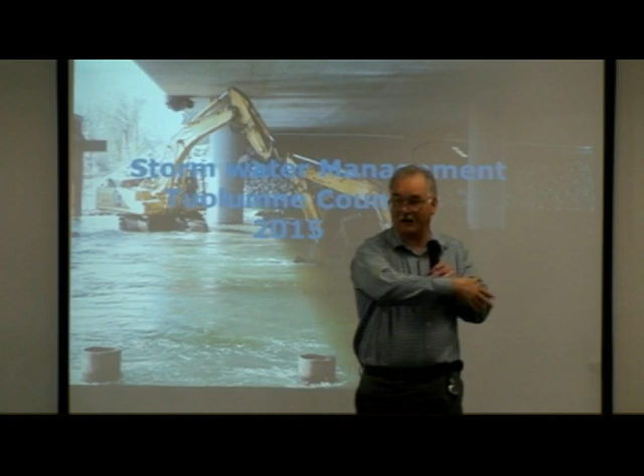We have a really good speaker, Rich Muhl from the State Regional Water Quality Control Board. It covers about 12 counties, and he has been involved in a lot of stuff that I'm going to let him talk about, especially with these fires. As you know, we had our own catastrophic fire, and you get a lot of erosion coming off of those situations, so we'll talk about that.

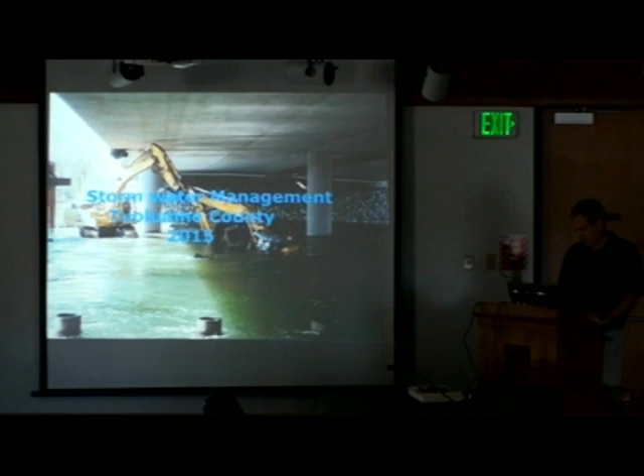And this picture has nothing to do with Tuolumne County. I just like the picture because if the excavator falls into the Sacramento River, it's a little hard to get out sometimes. So this is sort of what's going on here. One of the contractors made a little bit of an error, and it went right into the river.

So today I'm going to talk about some of the pitfalls that people have made when they've worked on construction projects. Some of those have resulted in enforcement actions. So I'm going to talk about some of the things people are not doing regarding the permit. What's going on with the permit right now is, as everybody knows, the new permit came out about 6 years ago. Everybody kind of had it figured out. The economy was doing pretty good, and then the economy sort of tanked. At that point, construction kind of stopped.

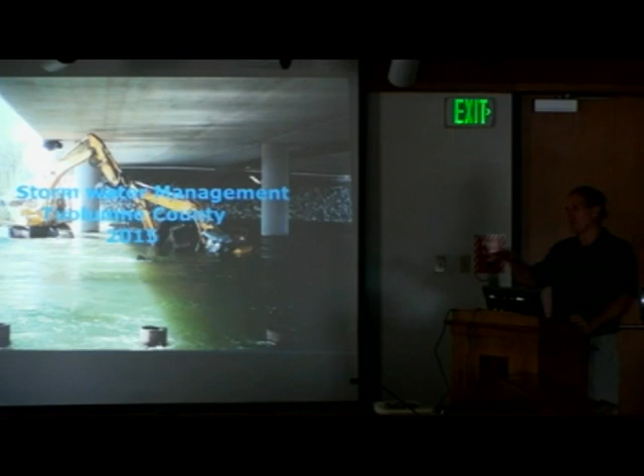And now people seem to have forgotten about the permit. Some people coin it selective amnesia. You can call it what you want, but at any rate, a lot of people don't understand the particulars of the permit, particularly risk level 2 and risk level 3 requirements. So that's what we're finding. So a lot of it is going to these sites and retraining on-site personnel on what the requirements actually are. So we've been pretty patient about doing that, and we're trying to work with everybody on it. But on the other hand, if you sign up for the permit, you have to implement the permit.

So I'm going to talk about a few things. I'm going to go through a site scenario, kind of a case study on a site that didn't follow the permit, and I'm going to talk a little bit about what they didn't do. I'm going to try and use that to show an example of what you don't want to do. And then I'm just going to talk about some other things. So we'll just get going. The first thing is, if it's over an acre, you have to file for coverage.

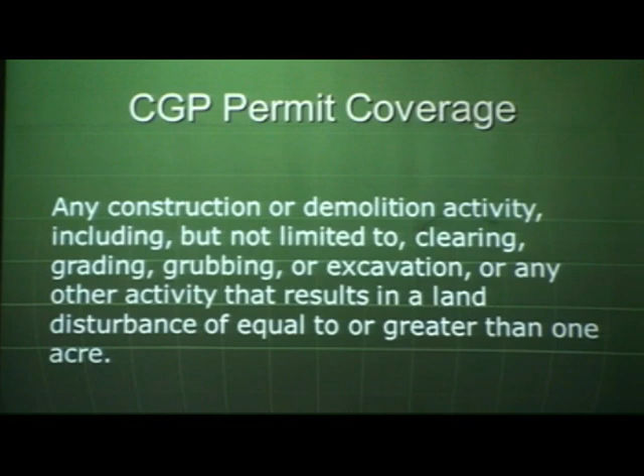You need to file for coverage if it's clearing, grubbing, grading, or excavation over an acre. A lot of people forget to file for coverage. It's clearly over an acre, and they don't file. So that's the first thing.

The second thing is the rainfall erosivity waiver gets used a lot. It's a great tool, designed for projects that are short-term and aren't going to be a risk to water quality. But if you try to get a waiver right now and go through November, that's probably not going to happen. You're going to be a threat to water quality.

There's other issues. For the rainfall erosivity waiver, if anybody's not familiar with it, basically you calculate the R value, and if it's less than 5, you qualify for that particular waiver. It has to be between 1 and 5 acres. So in some ways, it's a good tool, but it gets overused.

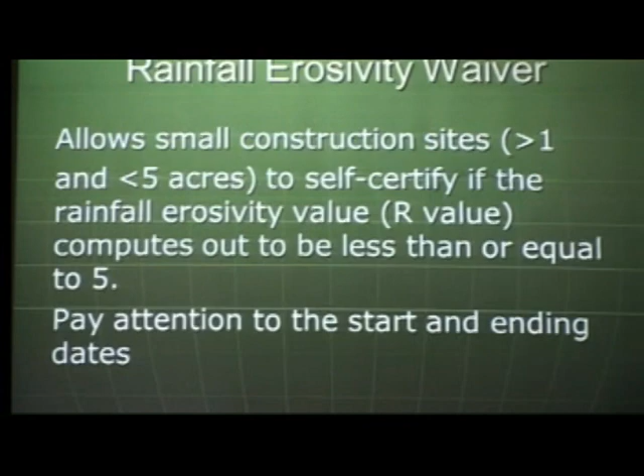The other thing to pay attention to is the start date and the ending date. When you file for the waiver, you put your start date and your ending date. Everybody pretty much knows construction projects hardly ever get going when they're supposed to. So invariably, you start a month later. Well, now that's a month out of your waiver, and you end up a month later, so you don't qualify for the waiver. That's one of the problems we're having.

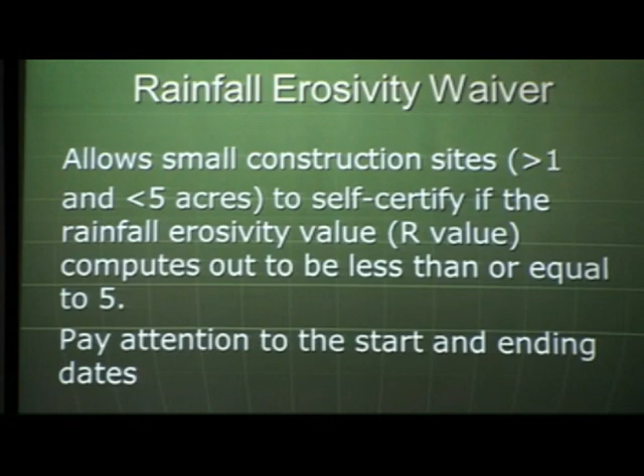There's a new permit coming out in about a year, and we're looking at putting some end date or some way to end the waiver, so we know it's complete. Sort of like a notice of termination under the construction permit - you'd have to send in photos and show it's stabilized. That's the other problem: people say, I have a waiver, I don't have to do anything. Well, yes, you have a waiver, but you still have to install best management practices, BMPs. So that's the other issue we have with waivers a lot.

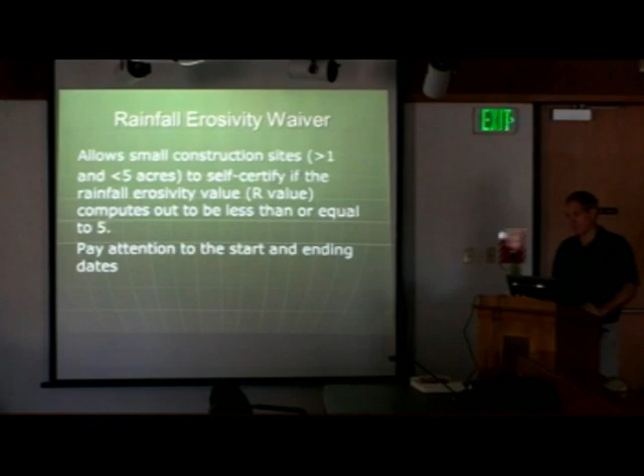Can you re-establish the start time of the waiver if you're starting a month late? Can you qualify your waiver? Yes, you can, but that only works so long, and then you get outside of that R value, above that 5 on the R value.

In the summer, you can kind of get away with that - if it's 20, 30 days, that's not a problem. But if you try to do that in the winter, it won't work, and then you've got to file for full permit coverage. So it creates an issue.

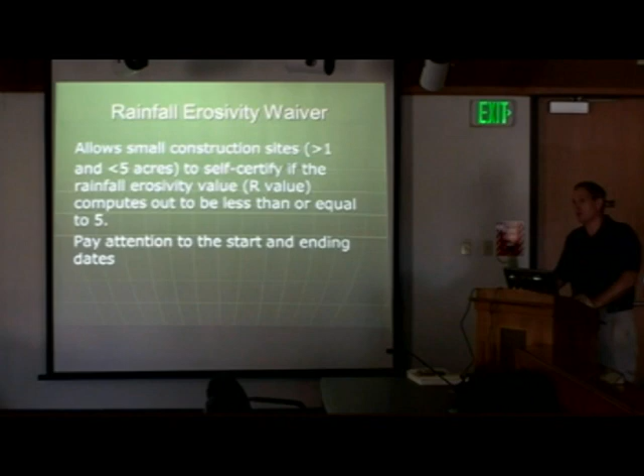Just make sure that when you pick those waiver dates, you're picking the date you're pretty sure it'll actually start. It doesn't take long to get a permit anymore - it's all done electronically. You don't have to mail it in and do all this other stuff, so it goes a lot quicker than it used to, which was sometimes 2-3 weeks if they were busy. It's not that long now, so you can compress it a little closer to your actual start date. Just a suggestion, because I love the waiver - I think it's a great tool, but it just gets overused sometimes.

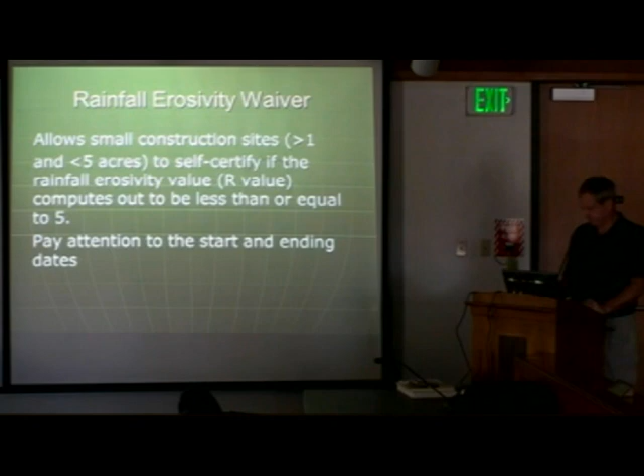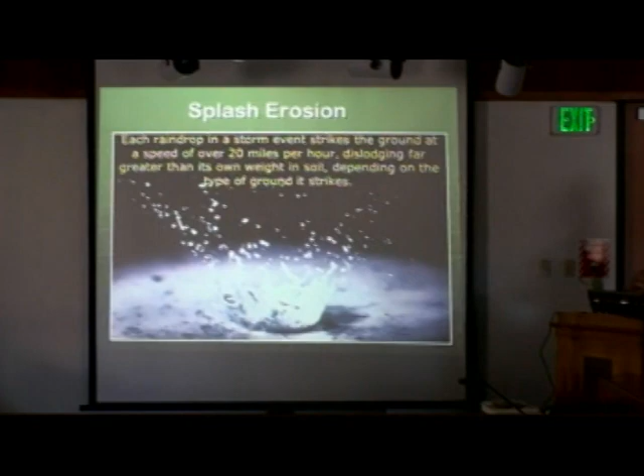Just a little bit of background: when it rains, the raindrop comes down about 20 miles an hour, hits the soil surface, blasts apart those particles, and causes erosion. Typically on a construction site, about 70 to 80% of the erosion is sheet erosion, and that's really what you're trying to catch.

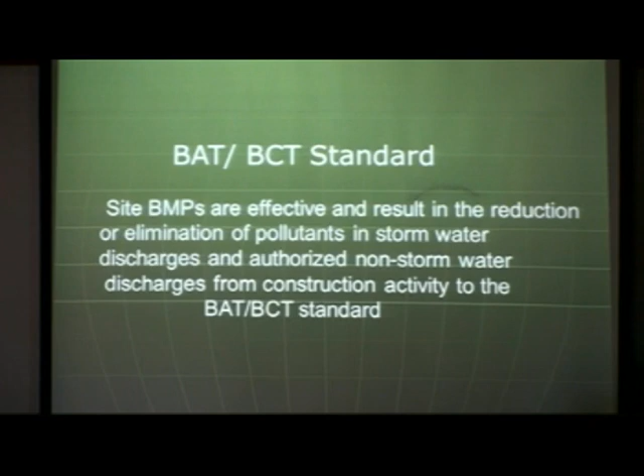I want to talk also about the BAT-BCT standard. The permit requires BMPs to meet the BAT-BCT standard, and a lot of BMPs don't. Hay bales, probably not BAT-BCT. If you want to build a check dam, hay bales work great, but not so good - there's better technology out there. One of the things we do during inspections is take a look at what BAT-BCT is and make sure people are using the available host of BMPs. I'll show an example in a minute of what I'm talking about.

And this is getting people in trouble. There are some old BMPs that work in certain situations, but there's better BMPs out there.

Hey Rich, BAT, BCT, what's that acronym? I don't know, here we go. I always forget it. Best available... here, I got it written down. Best available technology, economically achievable, and best conventional pollutant control technology. I always forget that.

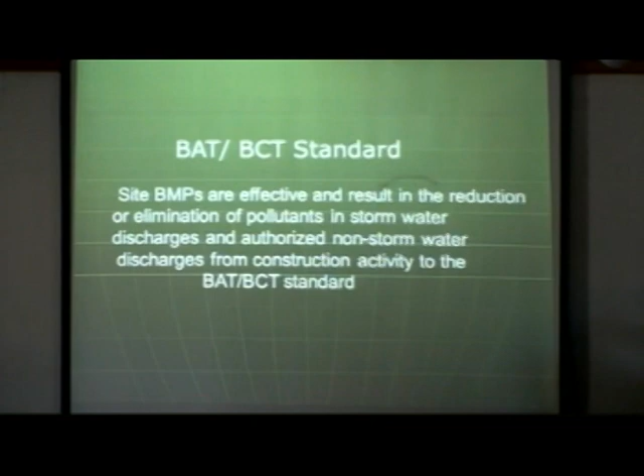But in the last probably 5 years for construction sites, the BMPs have gotten much better. The technology for erosion control has just gone leaps and bounds better. For sediment control, kind of the same. I mean, it's still silt fence, fiber rolls, your basic BMPs, that hasn't changed a lot. But for erosion control, it really has.

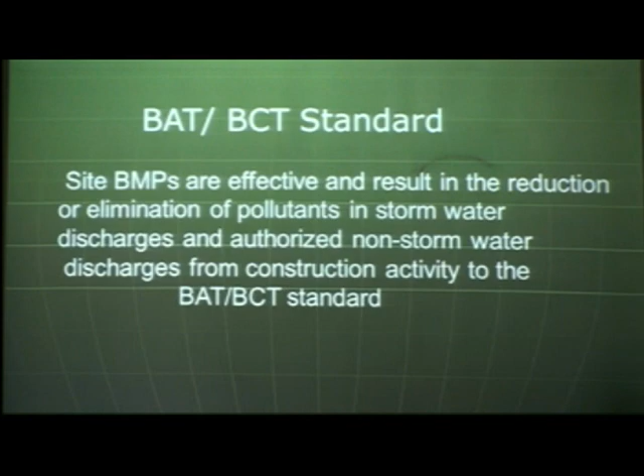They started working on this project in the winter. That right there is a red flag for us. We're going to really pay attention for any project working in the winter, particularly one this size.

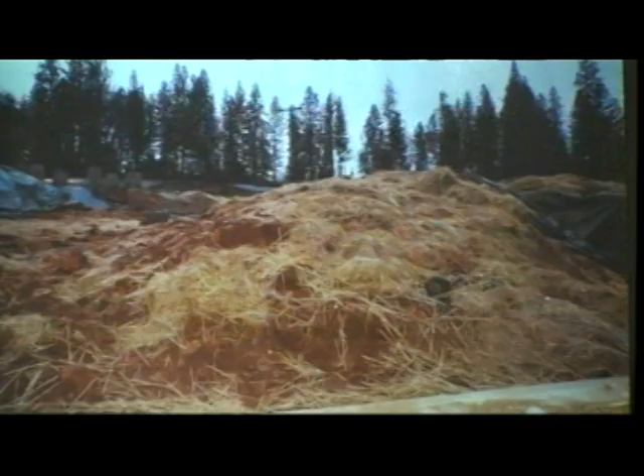So what they did is they went out and hand-broadcast straw as their BMP. Now when you look at this picture, you can see a lot of shadowing, you can just see soil. It's worse than shadowing - this is not going to protect the soil from the impacts of the raindrops once it starts raining. Clearly not BAT-BCT.

This is kind of what I was talking about. There are better BMPs out there that would have worked much better.

The other thing they're using on this particular site is a lot of plastic, Visqueen. Visqueen blows off the slope. So a lot of what happened to them - I'll show another picture - but it's on a big slope. Here's another picture during the rain.

You can see they put some more straw down because we'd been there multiple times. But again, no tackifier, it wasn't tacked down, hand broadcast, and it just washed away. You can start to see the rilling that's occurring. This is all going across, discharging directly into the creek.

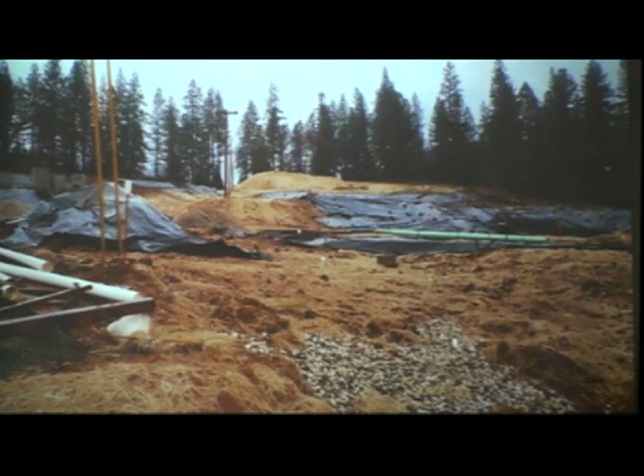Another shot of the same site. Again, a lot of plastic. What would happen is the wind would come up. It's a big slope, exposed to the wind. It would blow the plastic off every single time.

So we'd come back - I'd come back early in the morning. We have a couple inspectors in this area, so depending on who it was, somebody would come at night, somebody in the morning, but it really didn't matter. The plastic would be blown off the slope. So that was a huge issue for us.

And then the other thing is you can still see bare soil. If I can see bare soil, that's not a good installation of that particular BMP. Straw works, but you've got to get it on really thick. You can't do it like this.

Again, same type of thing. So now we've been there - I've been there at least 3 times. I've told them they need to have better BMPs. The city's gone out and done a stop work order on them, multiple times. Still, these are the BMPs they're going to use, and it's not an issue - according to them. So this is what's going on.

So we're going out here over and over and over. The other thing is - oh, this got fuzzy, sorry about that - but anyway, they have a storm drain here, and you can see how dirty the road is in front of the site. At the storm drain, they just got a couple rock bags. That's their particular BMP by the storm drain. It's not going to work when it really starts raining.

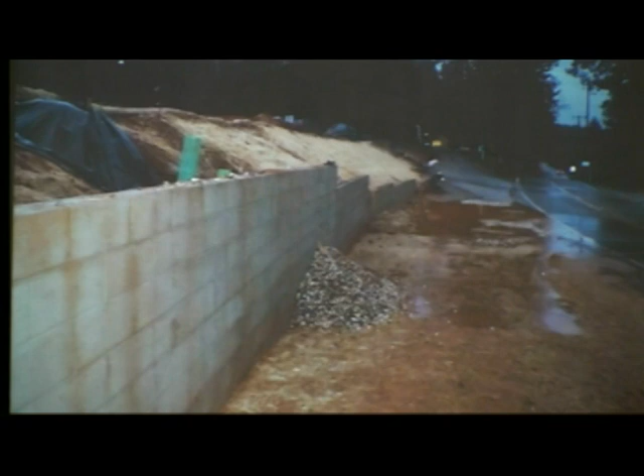So now it starts raining. I'm out there early in the morning. I had to wait to take pictures because it was way before the sun came up. But at any rate, it was discharging. It wasn't raining pretty hard, but it was still discharging. You can see it's coming through the wall - there's a little hole in the wall by that rock. It's ripping out there, and it's also going all the way around.

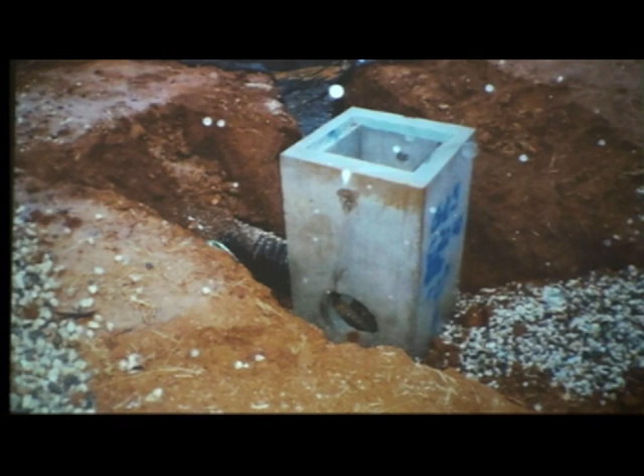The other thing is they have part of their storm drain system in, which could have been good, except that they didn't really have it protected.

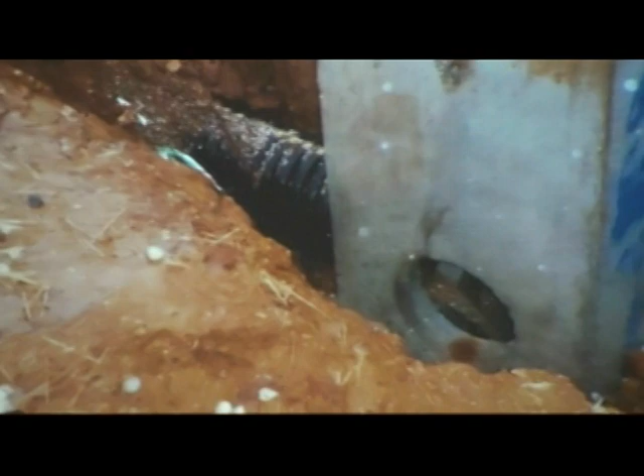So all the water on the site was going down into the storm drain. If you look in the little pipe there, you can see it popping down in the bottom, and it was going directly into the creek. So now they really just created a direct conduit to the creek, where before they had a little bit of buffer, the road, but now it's going directly to the creek.

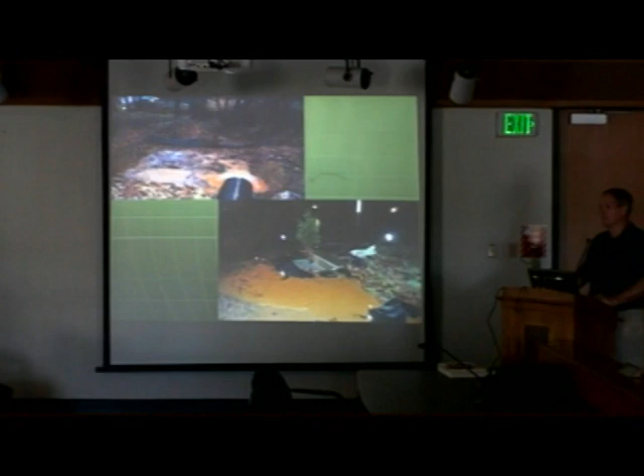So this is what it looked like. Here's the discharge directly into the creek, and they had silt fence. Well, the silt fence never had a chance. That's not what silt fence does. It doesn't work that way.

And down below, I talked about the actual rock bags. Those aren't working either. Some of the water is going straight down, but it hits another storm drain and goes directly across into the creek. So major problem on this particular site.

The problem is they had multiple chances to get out of trouble and they never did it. And the lesson here is if you have a regional board inspector or the county comes along and says, hey, you need to do better than this, you need to do better than that, listen. Because one of the things in this case, we did a joint thing. I was working really closely with the local municipality to deal with this particular project, like I do on all municipalities I work with.

And we were really trying to resolve this issue. It turns out they just didn't understand the permit. They felt like as long as it didn't discharge, what's the problem? Well, I was trying to get ahead of it and say when it rains, it's going to discharge, which it did. So that's just a little case study.

We end up with a lot of these, but this one's unfortunate. For me, it's really unfortunate because it didn't have to happen. There are some sites where they're just really difficult, building in the winter. When it really rains, you're just going to have problems. There's not much you can really do. This is not one of those. This could have been solved way up front. So that's the lesson there.

Rich, what were the fines on that site?

I can't talk about it. I just can't talk about it. So, I just can't talk about the case itself, but it's an enforcement action, yes.

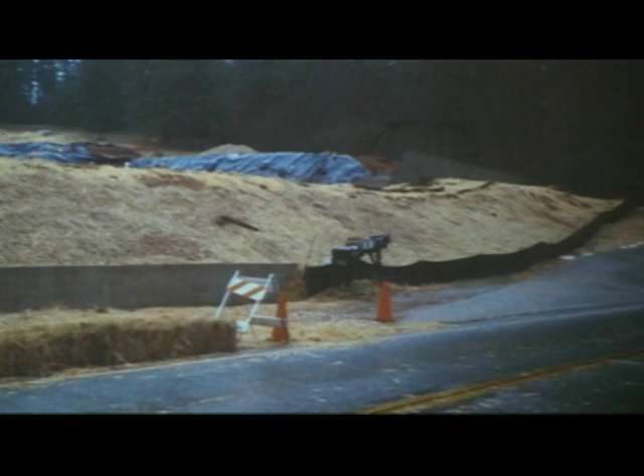So one of the things is finally they used more plastic, but also more straw. So it gets a little bit better. You can still see some dirt, but it is better. And so, you know, this looks a lot different than the first picture. And so now, it's still straw, though.

There's a lot of other BMPs available. So what would be BAT-BCT? Hydromulching, hydroseeding. You probably don't want to use hydroseeding on this particular site - not this site, but the other site I was talking about - because they're going to get back in there and disturb it, and then you just ruin the seed. That doesn't make any sense. There's no point to that.

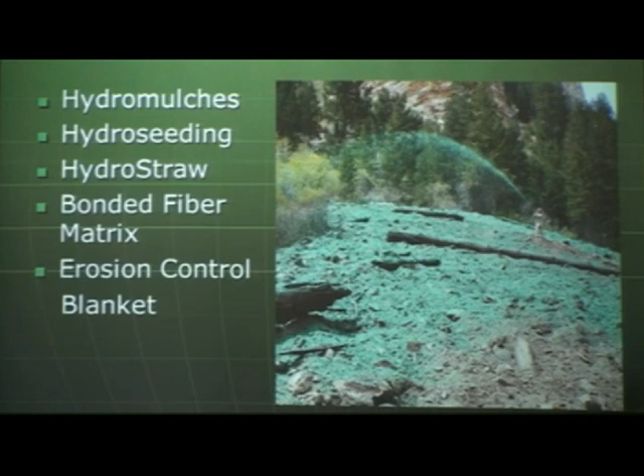But there's also HydroStraw, which is a new product that works really well. It's chopped up straw, but it's in a matrix and it sticks down really good. Bonded fiber matrix - Caltrans used BFM pretty successfully eventually on the Sonora bypass towards the end. And then erosion control blanket. There's a number of things, combination things they could have done on this project that would have made a huge difference. But these are things that are out there.

There's a lot of different products for different things: Flexterra, FGM. There's a bunch of names, but there's all these things that work really well in certain situations. And one of the things that I've really suggested to contractors, builders, and owners is talk to a hydroseeder and have them take a look at it and see what they think. If the straw itself isn't working, which clearly it wasn't in that case, then come up with something different. Talk to a hydroseeder, have them come out. They know what the options are. They're going to know how to help you the best, especially in a situation like that.

And one of the problems with that situation in that case was they kept coming out and rerunning over their BMPs. That's similar to the Caltrans Sonora bypass. What they'd do is they'd install the BMPs and then they'd run right back over them because they were grading those slopes.

And then before it rained again, they'd have to come back and put more BMPs in. So consequently, Caltrans spent a lot of money on the Sonora bypass because they had to keep reinstalling BMPs over and over and over. But that's what the permit requires.

For risk level 2, both active and inactive sites have to be covered with erosion control before a rain event. And up in this area, everything's risk level 2 or risk level 3. Most of it's risk level 2. So both active and inactive - people forget that. That's really an important point because when we're driving around before a rain event, even a day before, we're seeing if people are actually getting out there and taking care of the active stuff too.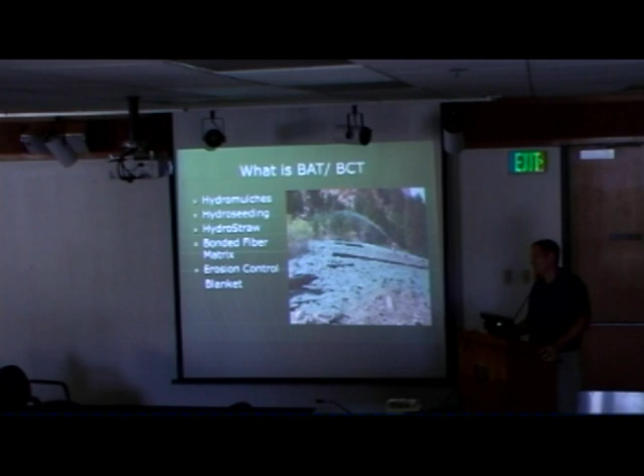And some of these products that are on this list, you also have to put down probably 24 to 48 hours ahead of time because if they don't cure, they're not going to work. If you put BFM down 2 hours before it rains, it's just going to wash off. And Caltrans did that multiple times on the bypass, and it just literally liquefied and ran off, and you'd have a bald spot at the top, and all the bonded fiber matrix would be at the bottom, which doesn't work too well. So you just really got to plan ahead, and that's stormwater management.

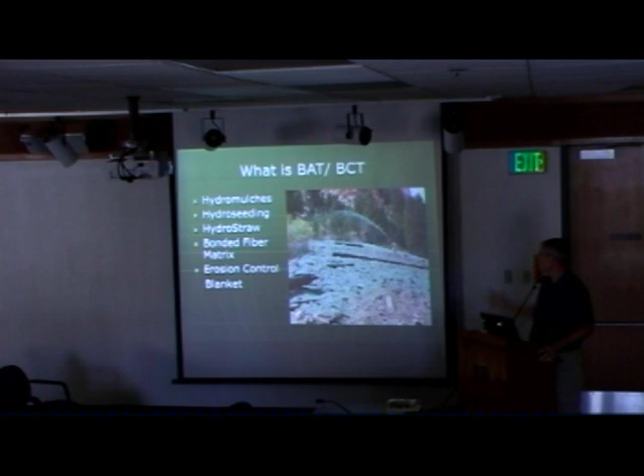So here, I think this is BFM they're spraying on this slope. This is up in the foothills, but it's pretty easy to spray, not that expensive. It's a good, effective best management practice. Any other questions regarding that? Okay.

Fiber rolls - this is the wildlife friendly fiber roll. It's important to use the wildlife friendly version for a couple reasons. One is you don't have to remove it at the end of the project. When we do an NOT, if there's anything that's netted, you have to remove it, including blanket. So if you're going to use the netted blanket or netted fiber rolls, you have to pull it out.

If you use this kind - there's a bunch of different types, there's just one of them, it's the burlap one - if you use the wildlife friendly, you can leave it in place. You don't have to remove it. Eventually, it'll just rot away. You'll end up with the stakes, but you can pull those out later.

So this is a different staking pattern because you're just kind of staking both sides. Caltrans sometimes will run a rope over the top too, to hold it down. No matter what, though, you've got to trench it in because it's round, so you want to make sure you trench it or it'll just cut underneath. That's happened to a number of sites last year too - they just dropped it on the ground. It's round, it's got tiny little bit of touch-in, and the water just goes right under. It's not going to work very well. So fiber rolls work really well.

I like them. They're good for cutting up the slopes. If you want to divide up the slope, because if you can slow the flow of the water down a slope, you're going to get less erosion. And the permit also requires them on slopes. But just use the wildlife friendly ones, and I'll talk about entrapment in a minute.

Rich, if you go back to that previous slide - you might talk about the tracking too that they did there. Yeah, they did track that, I didn't talk about tracking yet. Tracking back and forth horizontally across the slope is a good thing. You don't want to go up and down. You want to make sure that you've got it - did they track? Yeah, they did track the right way. That's got some impact on it from the rain, so it's hard to tell, but tracking is a good basic BMP.

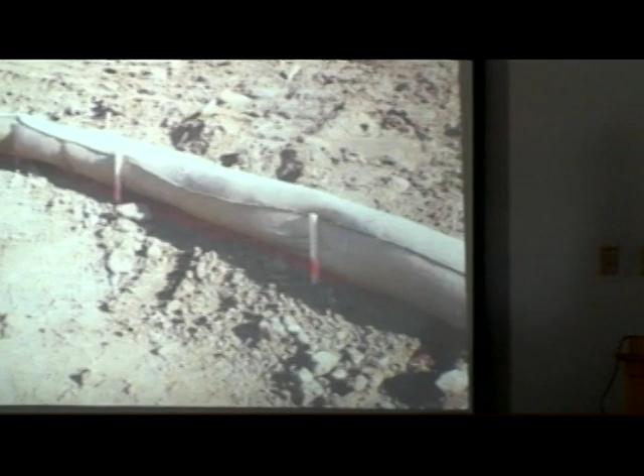You explain the direction of the tracking you said just then. Yeah, you want to make sure the grousers create little breaks, break it up. If you go across essentially, then you're just creating little rills automatically. So you want to make sure you go up and down.

We identify if that's wildlife friendly, but they're not - well, I'll go through it in a minute. If it has a net, it's not wildlife friendly. The regular fiber rolls you see a lot of times, they'll just have that netting on them. If it has the netting, it's not wildlife friendly. And even if it's biodegradable or photodegradable, it lasts for years. I mean, I've seen this stuff for like 5 years, I've been tripping on it on construction sites. So finally, eventually I'll just try and pull it up, but it just takes forever. And if it creates entrapment - I'll go through that in a minute - it creates another problem.

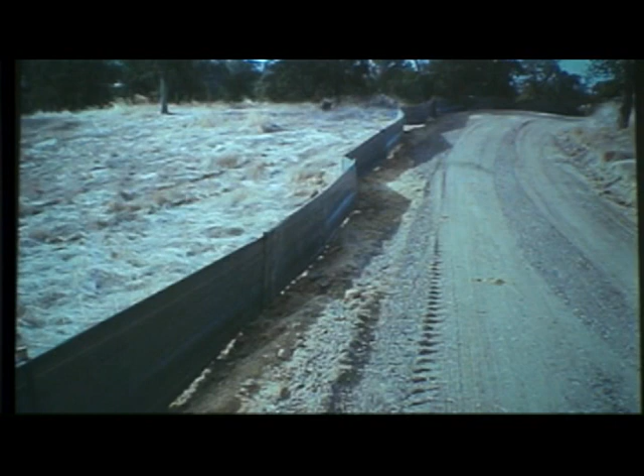Silt fence, you want to make sure it's installed properly. I use this picture all the time, but I just like it. It goes like half a mile they did this, so they had to go clear down the hill and reinstall all this silt fence. It was just the worst silt fence job I've ever seen in my life.

And so there's a line on the silt fence, and it's at the bottom. I think it's orange on this one. And you have to stake it in to that line. It has to be down there tight. So when I'm looking at silt fence, I go along and pull on the top, or I'll kick the bottom, one or the other. But I'll just pull on it to see if I can get it to pull up. So if someone just chucked dirt on the outside of it, I can pull it up. It's not going to work, and then I'll make them reinstall it.

So silt fence is still a decent BMP, but just make sure there's a number of things. If you use the wood stakes, half the time they fall over. They break and fall over, so a lot of people use metal stakes. But there's a number of different types of silt fence now. There's wire-back silt fence. There's all these different types of silt fence out there that will really work pretty effectively. So it's still a good BMP, but it just needs to be installed.

It's also high maintenance. I was told that for every $1 you spend on silt fence, you spend about $1 maintaining it. So it can be pretty high maintenance. So you might want to think about maybe another option if you can do that. So again, you got to make sure it's trenched down. You got to backfill it, because the sediment's going to pile up behind the silt fence, and you want to make sure it can hold it. It doesn't just fall over, and that's what often happens with silt fence.

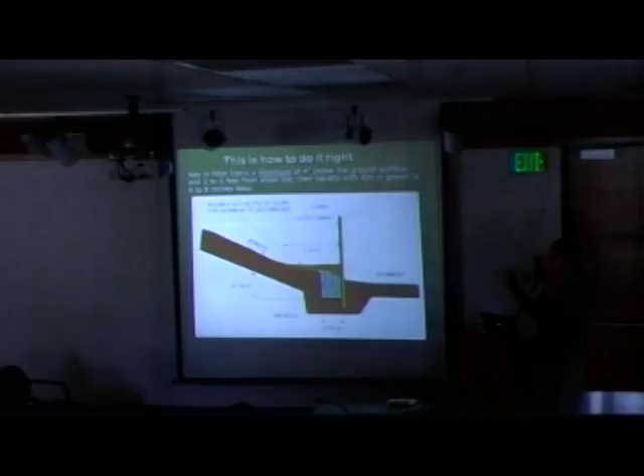That being said, I've seen wire-back silt fence where it had a lot of sediment against it. Essentially, it created a debris dam and didn't break. So I mean, it was pretty robust, but it can work if you design it correctly.

But don't ever put it, I don't have a photo, but don't put it across a flow too. I had one last year, I didn't put the photo in there, where the person put it right across the stream flow. So the stream just came, backed up, and created a little lake. It blew through the silt fence and ripped out half the hill at the same time. So that didn't work so well. So you got to kind of think these things out.

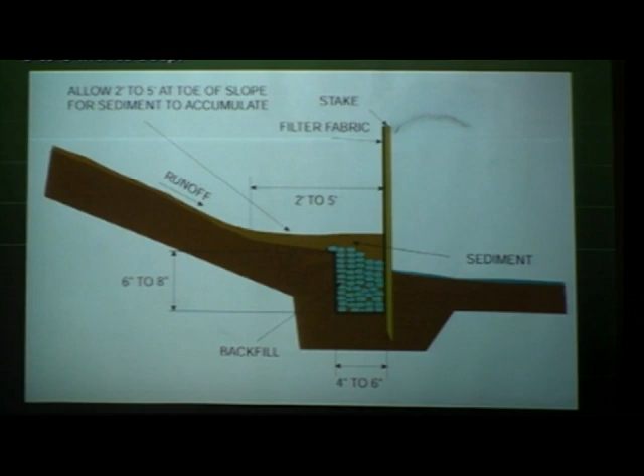So I'm going to talk about entrapment now. What happens with entrapment is we're having a real issue with snakes, lizards, birds. I get all kinds of critters that get stuck in erosion control blanket. And part of it is they'll get in there, they'll freak out, and they'll start wiggling around. I've cut some of them out, and they're totally freaking out. We've saved a couple snakes, and I think I saved a bird once, and everything else is pretty well dead.

So all permits now, Fish and Wildlife permits, U.S. Fish and Wildlife, California Department of Fish and Wildlife, Army Corps of Engineers, our 401s, all require wildlife-friendly erosion control products. So if you use the netted blanket or the netted fiber rolls, at the end of the project, you're going to have to pull them out.

We had a project up in Placer County. It was a large project. They put erosion control blanket out. Turns out it was a netted kind. Our inspector went out, didn't know that. It was right next to Orchard Creek. Went out and took a look at it. It was all netted, had to pull it all out. It cost him $30,000. We felt horrible. $30,000 mistake. And they had to replace it with the non-netted or the flexible joint.

So kind of what I'm talking about, I'm going to pass this around, is the flexible joint stuff. My sample's getting kind of beat up, but what it's got is a flexible joint on it and it'll spread apart. So if a critter gets stuck in there, it'll kind of move.

The other thing to think about, yeah, no, go ahead. Before you leave blankets, you talked about best practices that you see work well with getting vegetation to grow when your blanket is present. Do you see people putting seed under the blanket, over the blanket, both? Both. I think both.

Caltrans uses it, they called it the 4-step, which was the first time I heard of a 4-step program. So they use seed under and seed over. And in some areas it worked fairly well. In other areas it didn't work at all. The problem we're having right now, as everybody knows, we're in a drought. So if you use seed, typically if it pops at all, it'll pop and then it'll die back. And hopefully you've got some root structure. But we're having real issues right now with getting seed to grow.

So a lot of times what I'll see is it seeded under the blanket. They'll seed underneath, they'll put the blanket on top. But it depends how dense the blanket is. If you have a really thick blanket, a coir blanket or something like that that's supposed to last 4 or 5 years, it's really heavy. It's going to be pretty hard to get something to grow through there, because it's not really what it's for.

It's designed more for, and I see that on slopes sometimes, it's designed more for like the bottom of a channel so it doesn't scour out. That's a different type of blanket. So you want to make sure that you're picking blankets that, if you're going to try and plant through them, actually work for that application. Jute, I still see jute used. Jute sometimes works well, sometimes it doesn't.

So construction schedule, again, I said it earlier, but if you're gonna work in the winter months, you're going to have to pay attention to your site. That's the bottom line. We've already identified up in Roseville, Placer County, some sites that are going to work in the winter. You can work in the winter, it's fine. Everybody's okay with it. It's just going to cost you more money. It's going to be more challenging. You're going to have to work harder at it, and you're going to have to spend more money.

So a lot of times in the spring, I'll be out on site and I'll talk with the contractor and they say, we spent like $150,000 on BMPs this winter. I said, well, you worked all winter. I'm not surprised, but they're surprised. So you're just going to spend a lot of money. It's just going to cost money. So just keep that in mind.

So sometimes the benefit is worth it. Sometimes it's not. So just something to consider. When you have plans for work through the winter, that's going to be difficult.

Yeah. Do you appreciate the opportunity to engage with the project early on? I mean, it's hard sometimes to go from the government because they're going to help us. I understand that. But do you appreciate that, or do you just want to do your thing and look for problems? No. I mean, here's my philosophy. My philosophy on everything I do at the water board is to protect water quality. That's what I'm doing.

So I would much rather meet with the contractor, talk to the contractor, and try and work it out. I'm in the enforcement unit, and I do a lot of enforcement, but I don't want to do it. I want to protect water quality. I don't want that stuff dumping into the water so then I can go back and go after the person. I don't want it to happen at all. So I'd much rather be up front, and I think any regional board, if you're talking about Region 1, they're the same way. They're going to want to come out and help you as much as they can.

One of the problems we have is limited time. We're covering multiple projects, multiple sites, and every fall I've already had some calls saying, come out, can you walk my site, tell me what to do. We can't exactly tell you what to do. We can't say, here's the BMP. Sometimes in the foothills up in this area, I'll say, you could use this, this, or this. I think all three would work. But I'm not going to say do this, because then if it fails and I come back and issue you an NOV, you're going to say, that's what you told me to do. So that doesn't make any sense, so we can't do that.

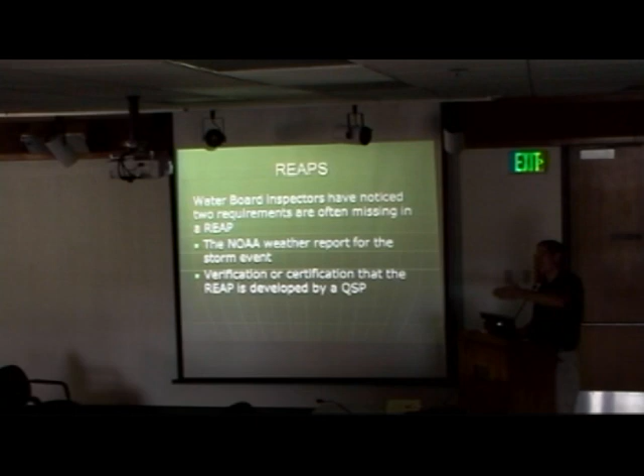The other thing, the rain event action plan - no one likes REAPs. You need to do the REAP 48 hours before the rain event, but you also need to install the BMPs. So a lot of times what happens is people may work on the REAP, but what they really do is try to install BMPs. I'll go out and do an inspection during the rain, and I find they haven't written their REAP yet. I'll say, okay, that's fine, what were you going to put in it? That's more what I'm concerned about. But you still need to do the rain event action plan.

There's a couple things that people don't attach to that. Make sure you're attaching the NOAA weather report - actually print it, staple it on there, so we know how much rainfall was actually forecast. That's one of the things people forget to do. And make sure it's done by a QSP, Qualified SWPPP Practitioner - it's got to be a QSP, or it could be a QSD, Qualified SWPPP Developer too, that's fine. But typically we don't. Just make sure it's not the site superintendent doing this, because that's not what the permit says. And if something goes south later on, we go through all the paperwork and look for any inconsistency, and that becomes another violation. So don't fall into that trap.

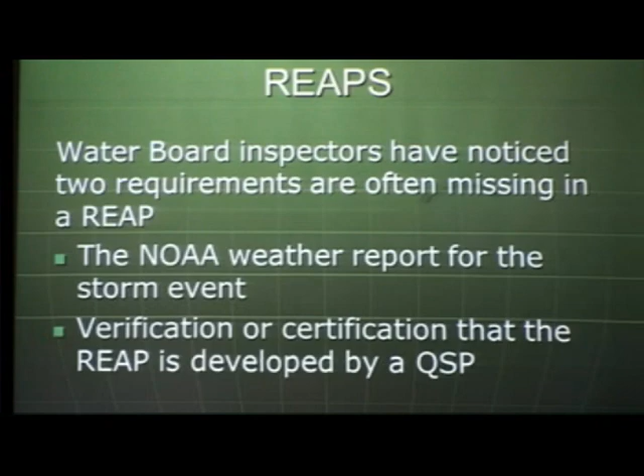Make sure your SWPPP is on site. I'm still running into sites where there's no SWPPP on site. I mean, I know it's uploaded into SMARTS, but I need to see it on the site, at least the SWPPP map, so I can figure out what you're trying to do.

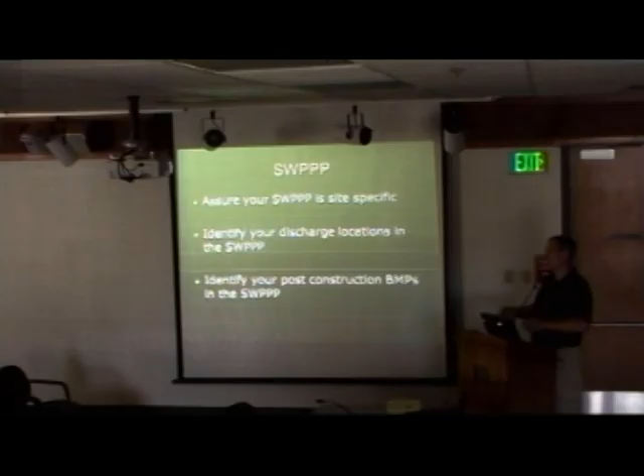You want to identify the discharge locations. I can't tell you how frustrating it was last year - I'd go out and do an inspection, I'd ask where are your discharge locations, and they'd say, well, I'm not sure. You're supposed to be sampling - how are you going to sample a risk level 2 site if you don't know where your discharge locations are? It boggles my mind sometimes. So then we'd have to go out and identify the potential discharge locations, because I don't know for sure, and then they'd sample. But just something to keep in mind - you want to make sure you know where those are.

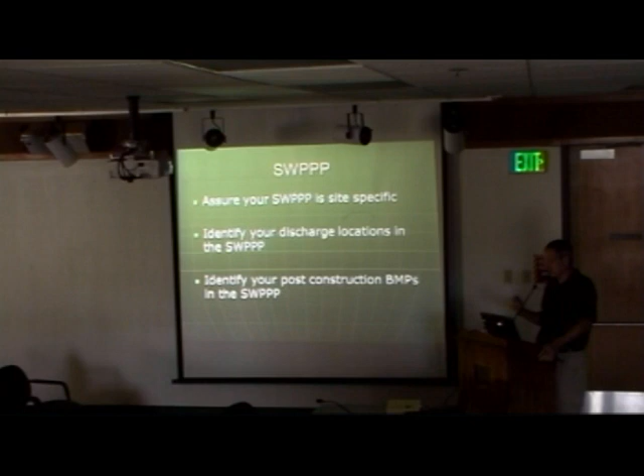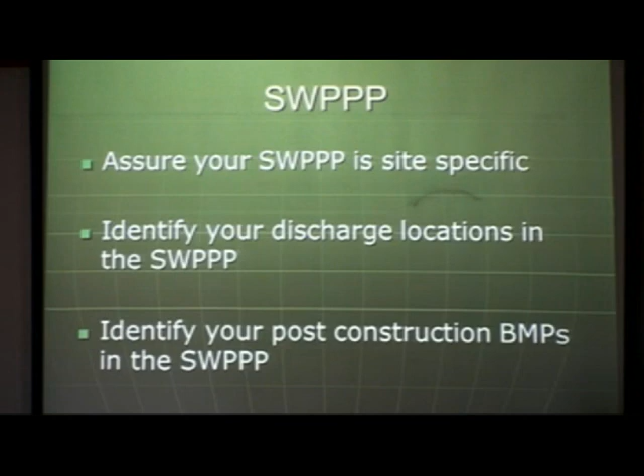The other thing is identify your post-construction BMPs. I'm going to talk about that at the end of the presentation today, but post-construction BMPs are a big deal. What we're doing now before a termination is asking, what were your post-construction BMPs? If you're in Tuolumne County, you're going to use the calculator, which I'll show in a few minutes. If you're in other counties that have a Phase 2 permit, like Calaveras, you're going to use their own requirements, but I'll talk about that in a minute. Just make sure you've identified them in the SWPPP - what you're going to use.

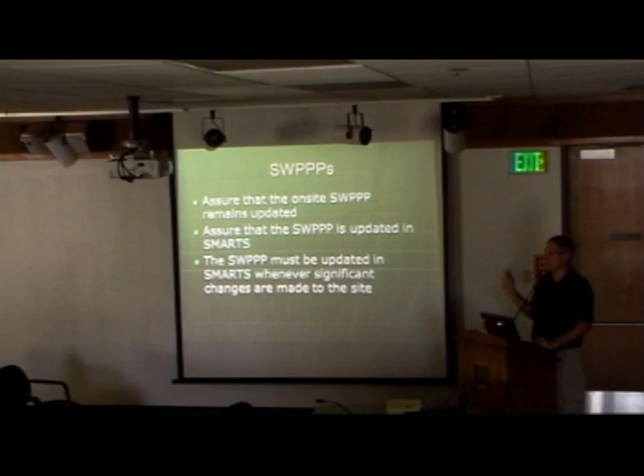Also, make sure it's updated. I've been to several sites where they've made pretty major changes to their facility, the way they're building it, and then they didn't change the SWPPP, so it totally doesn't reflect the site. And if you make major changes, make sure it's updated in SMARTS too - that's the other thing.

Monitoring and inspection - just be aware post-rain event inspections are required on all sites, regardless of the level of activity, even risk level 1. This gets people in trouble all the time. An inactive site still has to comply with the permit requirements. So if it's inactive and you have a permit, you can terminate it, or you can refile for coverage if you want to do that. If you stabilize it, most people don't want to do that, but if you completely stabilize it, you can terminate it and then start again in the spring - some people do that. But if it's active, you have to go out and do weekly inspections and maintain your BMPs.

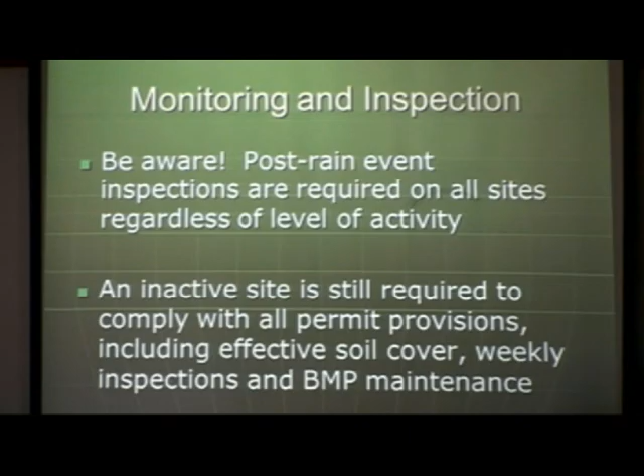So if you're in Tuolumne County or Calaveras or wherever, and you're above the snow line and you get a lot of snow, it's kind of hard to do an inspection when snow is covering your BMPs - talk to me, because then I can give you an exemption and work with you to relax those requirements. Typically what I'll do is have folks go out once a month, take a look at the site if they can get there, and just make sure it's all stable. But it depends on the site, where it's at, and a lot of other things - I can work with you on that. But if it's one that's going to be exposed year-round, you still have to go out and do those inspections, just the way the permit works.

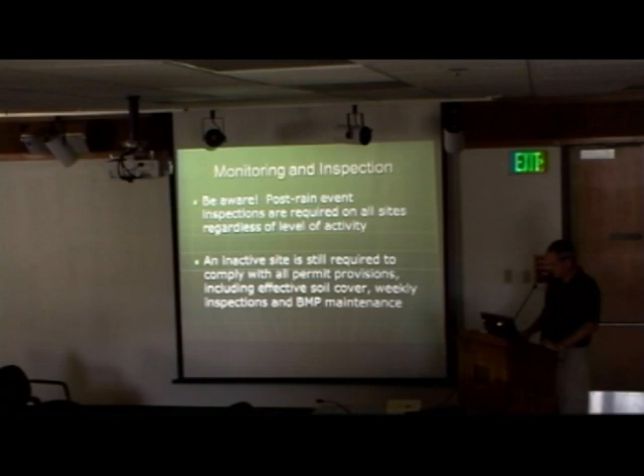So this is an inspection report, which says nothing. It's a bunch of checks. Yes, no, no, yes, no. Every inspection report on this particular site for this one looked exactly like this. Didn't say a single thing.

When I go out and do an inspection, I'm looking for good things, mostly for photos for classes like this, or I'm looking for bad things, probably for photos for classes like this too. But nevertheless, I'm looking at both, and I can always find both. There's both out there. So how can you do an inspection and have nothing wrong with the site?

Typically there's something. Just write something down that you're going to improve. I mean, don't make stuff up. If it's perfect, it's fine. But normally that's not the case. So make sure you're writing stuff down and you know what you're going to change.

So here's what was wrong, here's how we're going to fix it, and then the next time, here's how well it worked. You know, so it kind of tells a story. That's probably the best way to describe it. And if you do that, that'll really help.

One of the things we do when we do inspections is we look at the inspection reports. We look at them all the time to make sure that you're maintaining your site. Just like I talked about earlier, if you know what's going on at your facility, then it's better for everybody. So, no discharge.

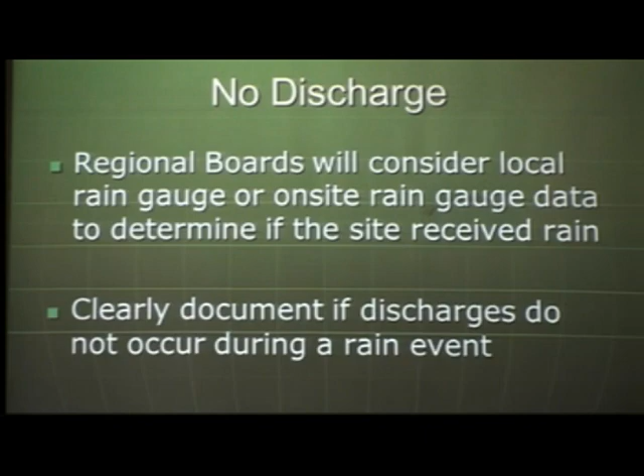Let's say I'm working in Sonora and there's a site 25 miles from here. Sonora gets an inch, I go there, they say we didn't get any rain, or we got a tenth of an inch. It could be, but if they don't have an on-site rain gauge, I have no way to tell. So I have to use the nearest tipping bucket. And if they have an issue, I'm going to have to say, well, you don't have a rain gauge. I'm using tipping buckets on both sides of you, and they're both at 1 inch. Maybe you're in a rain shadow, but I don't know.

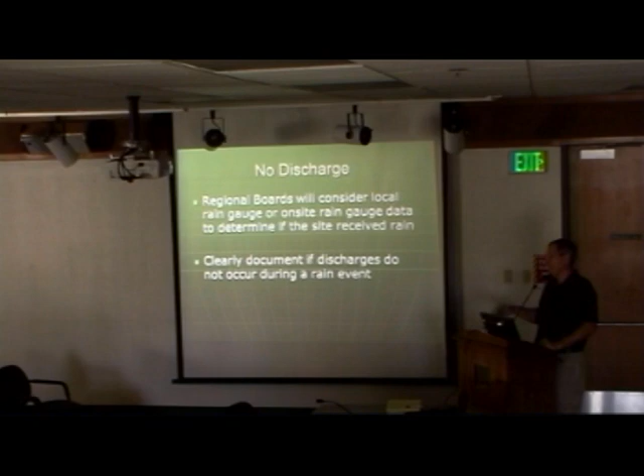So make sure you have an on-site rain gauge. That's the take-home message here, because you want to really be able to defend yourself. Say, here's how much rain we had, here's how well my BMPs worked. It's really key. And you want to know, too, if it's at night and you come in the morning and you got 3 inches of rain and your BMPs are really working well, that's awesome. That's what you want to know. But you want to know how much rain you got.

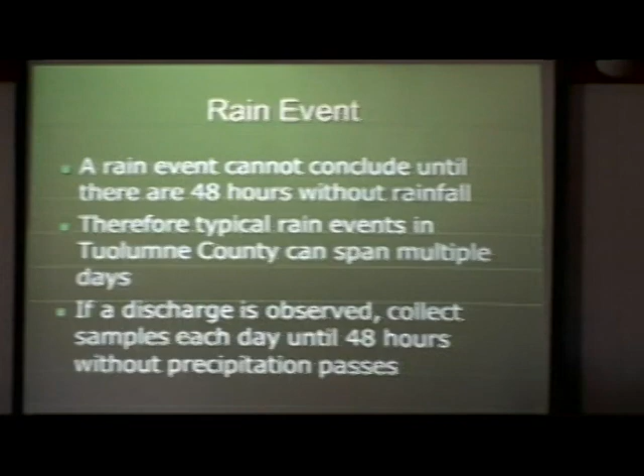Keep in mind, too, that a rain event cannot conclude until there's 48 hours without rainfall. So in Tuolumne County, a rain event can span multiple days, can run for multiple days. So you need to keep sampling until it actually dries up. And if you observe it, yeah, that pretty much covers that.

On risk level 2 and 3 sites, you want to take a minimum of 3 samples each day, and make sure that they're representative of the site. I went to a site last year with 5 discharge locations. 2 were turbid, 3 were relatively clear. They sampled the 3 clear and left the 2 turbid ones unsampled, except I was sitting there and I saw them doing it. So we had a chat, but they have to sample at each discharge location.

So minimum of 3. If you've got defined discharge locations marked on the SWPPP, and they just decided they're going to keep the numbers down -- it's a numeric action level, it just means you have to improve the BMPs, it doesn't mean don't sample. So don't do that. That was a bad strategy, and I think they learned, and they didn't do it again, so that was good.

So did they need 5 for the day? Well, they should have taken at least 5, right, because they had 5 discharge locations, and then they could have used those 5, and I would have been fine with that. So what a lot of folks do is take 2, it just depends on the site. Every site's dynamic, every site's different. They may have 2 main discharge locations, taking one here in the morning and one in the afternoon. It just depends, and it also depends how many sites you're trying to cover.

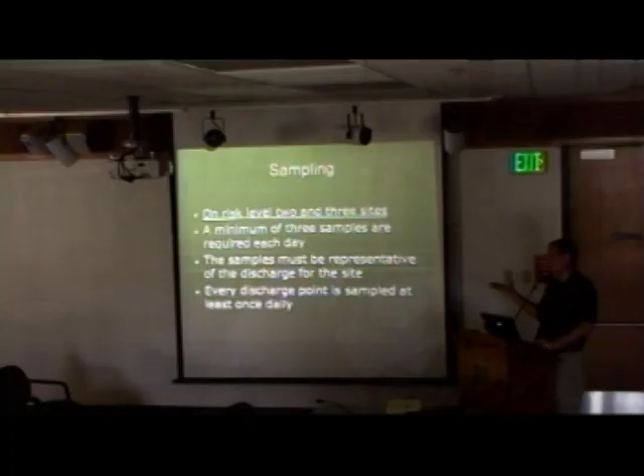Sonora Bypass had issues because their QSP, mostly, was trying to pull so many samples she couldn't get from one end of the site to the other -- it took all day. So it depends how big your facility or your site is, because sometimes it just takes a while to take those samples.

So here's a good example. You're going to go out and take your samples. You sample for pH - that really hasn't been much of an issue in this permit - and you sample for turbidity using your turbidity meter. Typically they cap off at around 1,000 NTUs. Some go higher, but most are about 1,000.

Here's an example of an enforcement action we had where they wrote, if you can read it, 'not reportable exceedance' where the arrow points. It took me about 4 hours to figure out what that meant. What they meant was it's above 1,000 NTUs, so since it's above 1,000 you don't have to report it. No, that just doesn't make any sense. Clearly this QSP did not understand the permit and made a whole bunch of other critical errors on this project, but this was one of them.

They got 4.6 inches, a tremendous amount of rain, and it was above 1,000. Okay, well that could be - that's a lot of rain, I can believe that. But yet 'not reportable exceedance' doesn't make any sense. So if it's above 1,000, just put greater than 1,000. You don't have to get the exact number.

Sometimes we'll try to figure out if your discharge is like 3,000, 4,000, 2,000, just to get a rough number, but you don't have to do that. If it's above 1,000, just put greater than 1,000. That's all you've got to do. And then just improve your BMPs if they're not working.

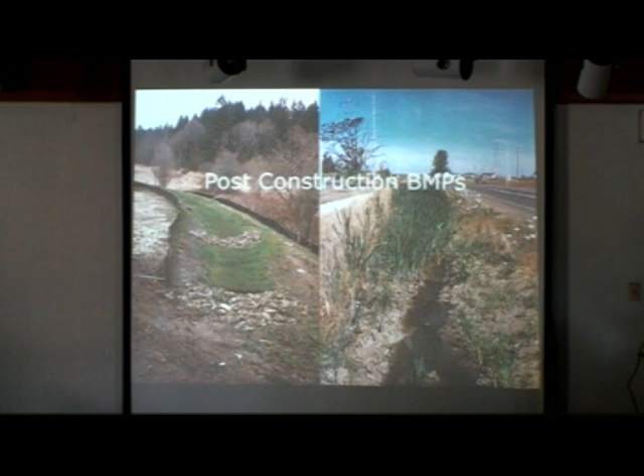So now one had to put in a grassy swale, one planted a bunch of extra trees. They had to scramble around at the end of the project. Their engineer's freaking out because they're scrambling around trying to come up with a way to put these post-construction BMPs in to meet the local requirements.

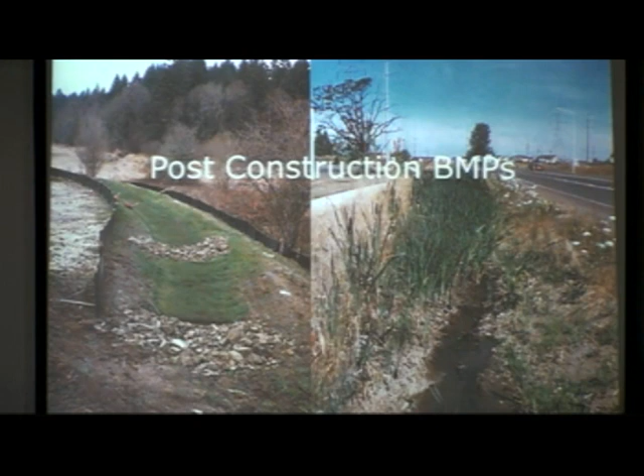And these are in municipalities, so the municipality should have told them that they needed it, number one. That's one thing that bothered me. The second thing is, one of them was a commercial site, so it didn't have a lot of space. They ended up putting in some curb cuts and doing some stuff, and it worked out fine, but it was way after the fact. So just make sure it's planned in there.

Post-construction BMPs can be pretty easy in the foothills - a grassy swale, vegetated swale, the picture's here. There's two main categories: source control BMPs and treatment control BMPs. A lot of times people use a combination of both, typically.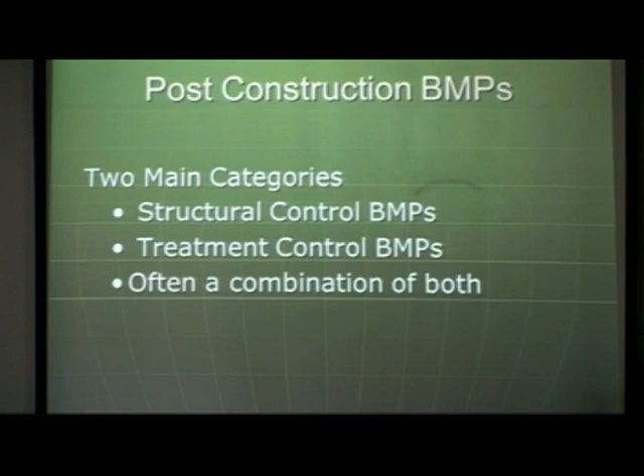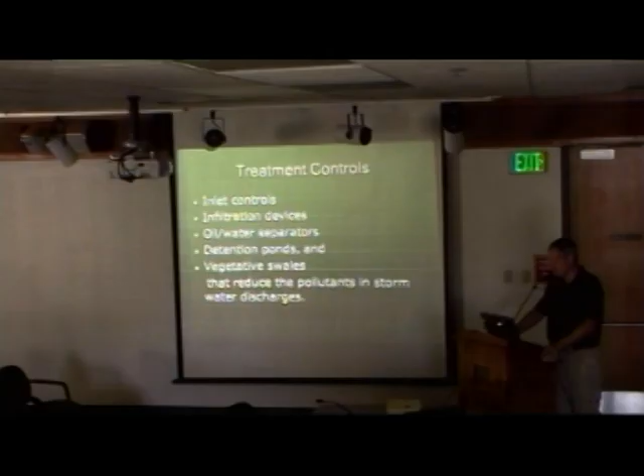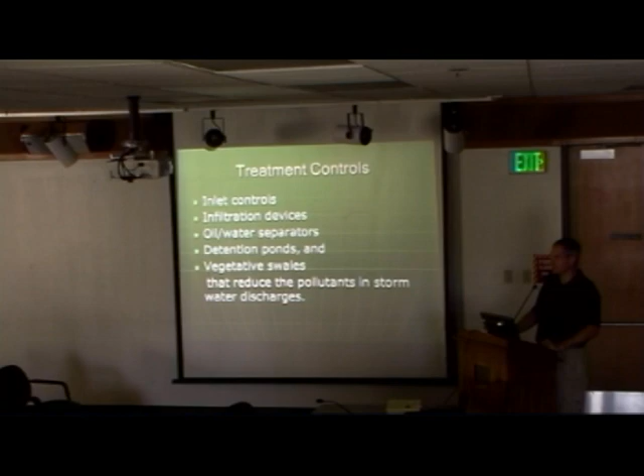So treatment control BMPs would be inlet controls, infiltration devices, oil water separators, detention ponds, vegetative swales that reduce pollutants in stormwater discharges. There's a lot of different things you can use. There's a lot of good information on post-construction BMPs out there - really good specs, what's effective, the conditions they work in, the pollutants they control. CASQA also has a good manual on that.

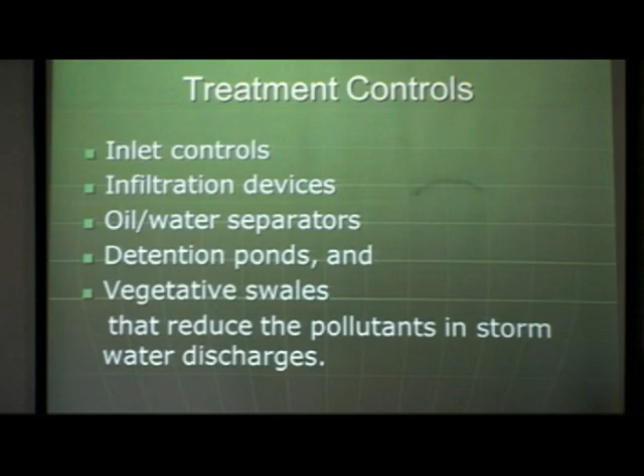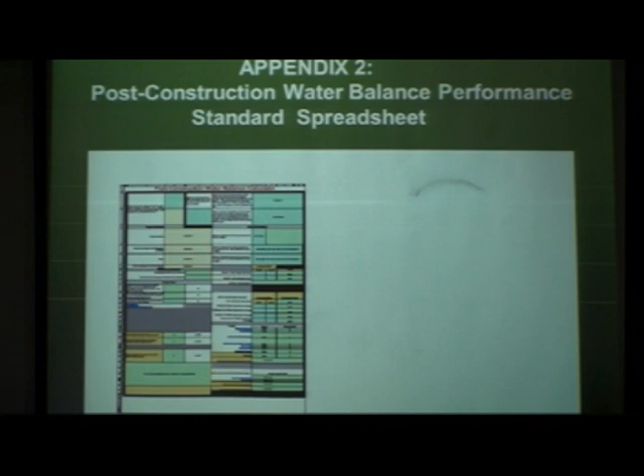So there's a lot of information out there if you want to pick post-construction BMPs. In Tuolumne County, it's not a phase 2, so you're going to use this calculator. This is a horrible picture of the calculator - I need to put another one in the presentation. But you're going through and looking for credits, so you're looking for credits to come up with a number.

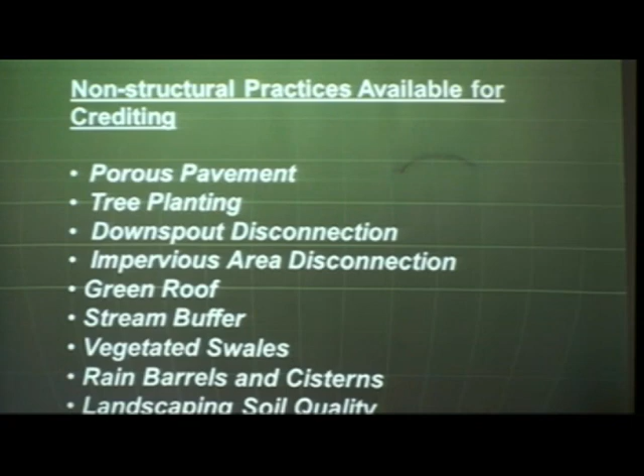So these are what's available for crediting: things like porous pavement, tree planting, downspout disconnection, green roof, stream buffer. Stream buffers work really well, everybody likes stream buffers - that's a good way to get credit. If you can just slide back 20 feet, 25 feet, something like that, you get credit for that. That's a good way to go sometimes, especially if you're along a creek channel.

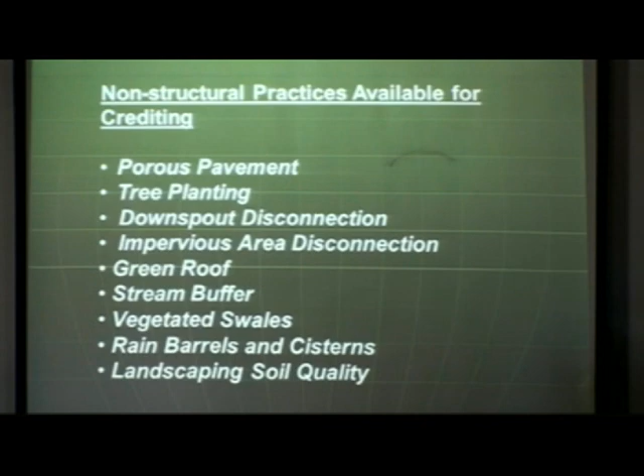But you want to come up with enough points to make the calculator work. If you're in a phase 2 municipality, they have their own requirements. So what we do is ask, did you meet the phase 2 requirements? And if you say yes, sometimes we call and check, did they meet the phase 2 requirements? So we're double checking there, making sure you're meeting those requirements, and they'll have specific standards they want to see.

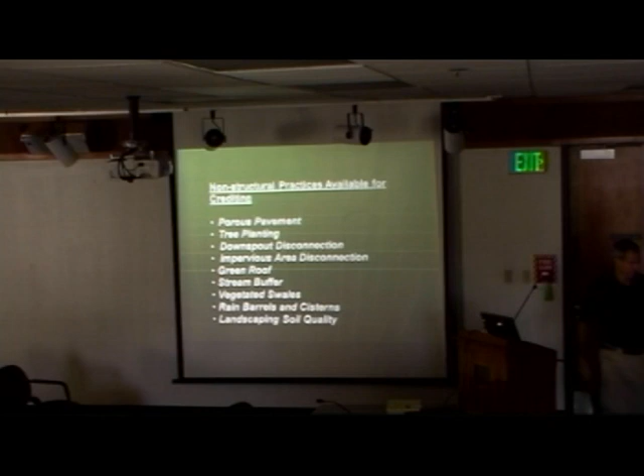The porous pavement, the porous concrete - we haven't had a lot of luck with those. They do tend to plug up with time, so that's a pretty expensive treatment to have plug up on you and then nothing. What you're trying to do with post-construction BMPs is treat the stormwater for perpetuity, so to speak, whatever that means. And if it's going to plug up - I've had the same issue with porous pavement.

This was just on the calculator. I don't know who came up with this list, but it was just a bunch of basic BMPs. What most people do is the downspout disconnection, the stream buffers, the vegetated swales, and then they'll also improve the landscaping soil quality. But there's a combination, and they'll plant trees - they'll just put extra trees in, and you also get credit for that too.

So if for some reason you try to use the calculator and you can't make it work, and you say, look, I just can't, there's no way - I'm trying, I can't stick enough stuff in here - let me know, because sometimes they'll use structural BMPs in combination with these. So maybe if it's a commercial site, you're going to have an oil water separator or something else in there anyway, so you get credit for that. But that may not be enough.

Then you've got to - and this happened, I think, with one of the big box stores that went in Sonora - I had to work with them because they couldn't do it. They put in a structural BMP and they still couldn't get enough points. So I think they did some additional things to try and fit that, though I can't remember now exactly what.

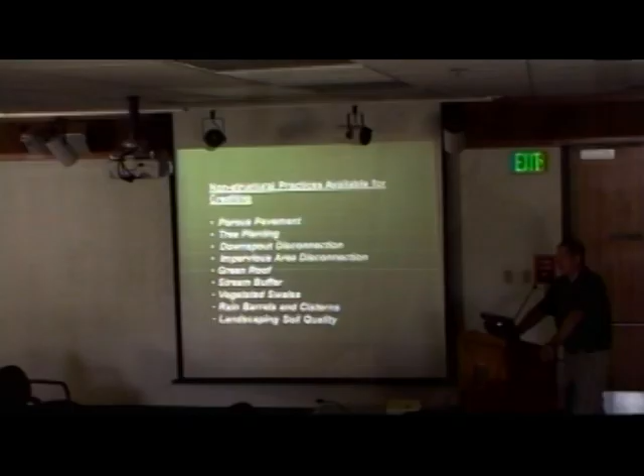Yeah. That's basically where you just run it into the grass, essentially, instead of going straight to the street. A lot of times residential, they'll just pipe it straight to the street. So now you're running it through, typically they'll build a little rain garden or something else, some rock, it'll sink down in there and it'll have an area to sort of settle out, and then it'll just perk through the grass.

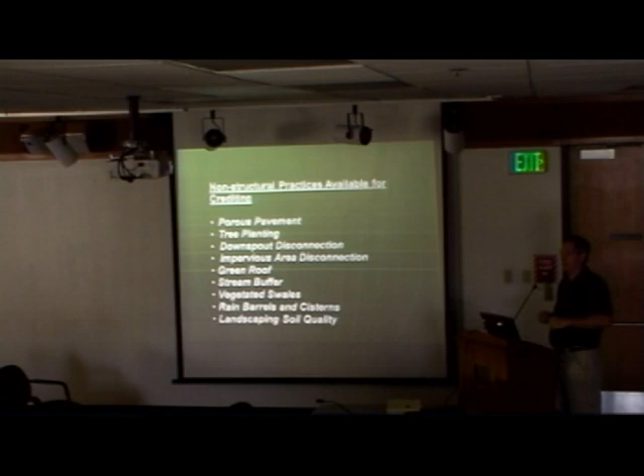Not a grassy swale. A lot of times they'll plant trees. I don't think I have a picture of one. It's like a little depression, and it'll have gravel in it, or mulch sometimes. And it'll have loose soil. It'll have some trees and some plants to uptake that stuff. And then it'll just kind of soak through the yard. We see them on commercial too. It's the same thing though. It's just designed to, instead of piping it straight out, just let it sort of perk

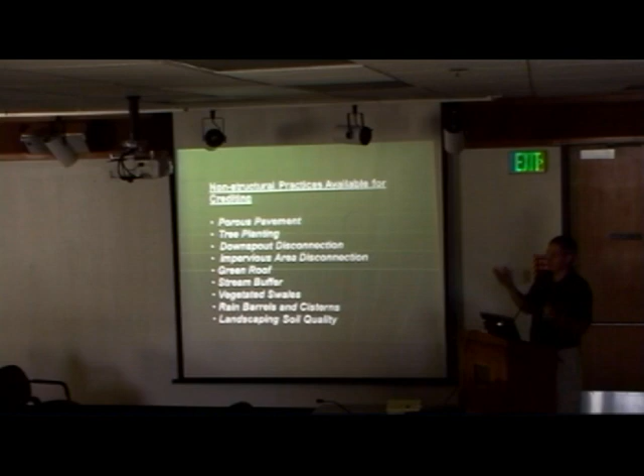back in the ground. With the drought particularly, there's a lot of emphasis right now on trying to recharge the groundwater. But if you've got rocks, it's not going to work very well. And down in the valley, we've got clay soils, and that's not working very well either. But depending on the soil type, it can be pretty effective to recharge the groundwater.

I want to help you figure out your particular project so that you don't have any issues. It's important for us to make sure that we're protecting water quality, like I said earlier, but we want to help you. That's part of why we're here. We're not just here to run around, and we really are the government. We're trying to help, actually, surprisingly. So we do want to help you any way we can. So, questions?

Okay. So my first question is, can you talk a little bit about sites that are less than an acre but still impact water quality? Do you have to go through the same process? Because I think people incorrectly assume, well, I can do anything to harm water quality as long as the site's less than an acre disturbed, which obviously is not the case.